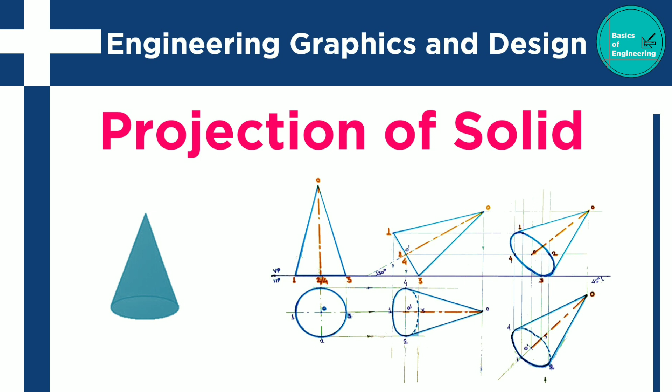Hello everyone, and today we are going to solve a problem related to a projection of solid. For that we'll solve one example.

This is the example: a cone with the 40 mm base circle diameter and height 70 mm resting on HP such that its axis makes an angle 30 degree to HP and a top view of axis is inclined at 45 degree to VP. Complete the projection. So this is the question related to the cone. Let's start to solve the problem.

This is the cone. All of you know that this is the base of cone, this is the apex point, and this is the surface of a cone, where the axis is from the center of the base and the apex point. There is the one axis. So in the problem, the data given is the base diameter of the cone is 40 mm, whereas the height of cone is 70 mm.

Now you can see here the top view of cone is simple circle. So when we observe the cone from the top side, it is visible as simple circle, whereas the front view of the cone, when we are observing from our front side, you can see here it looks like one triangle. So when you observe a cone from the front side, it looks like a triangle. When we observe the cone from the top side, it looks like a circle. So let's start how to solve the problem.

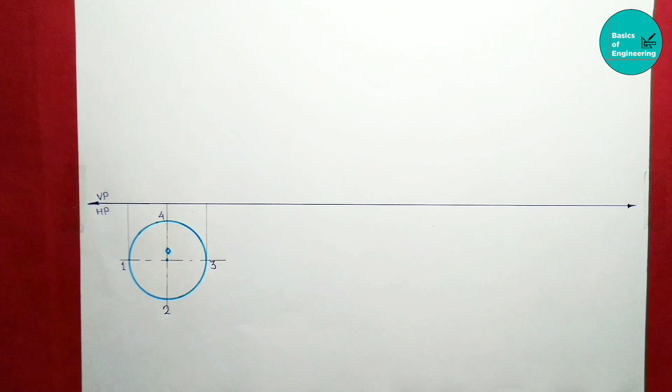Now take the projection of all points. This projection should be vertical. Projection of 1, projection of 2, projection of 3 and projection of 4. So projection of 2 and 4 is at same line. Now the height of cone is 70 mm. From O point, draw an axis with the height 70 mm.

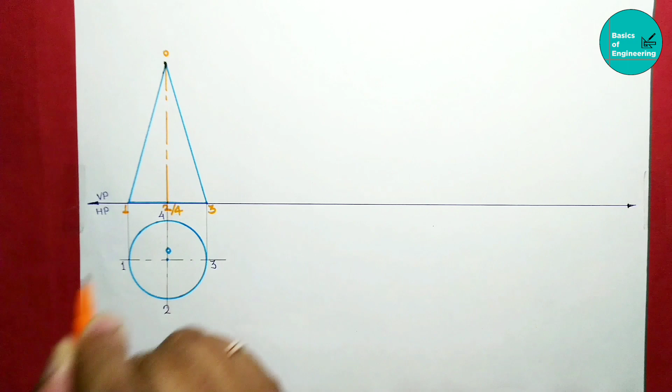So this is the height of cone, which is 70 mm. And now join all these points and complete the triangle. The name for each point: point number 1, point number 2, point number 3 and again point number 4. So this is simple front view of cone and top view of cone. So this is called first position of solid.

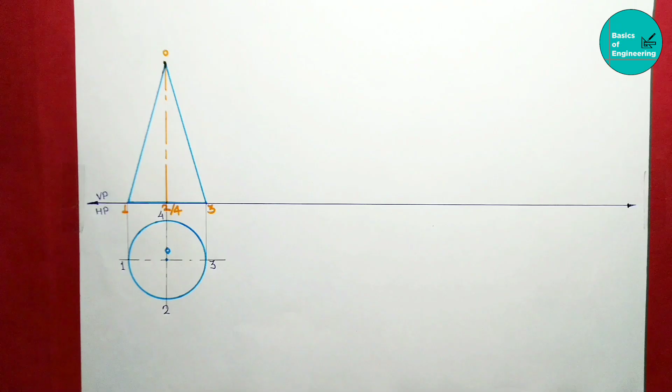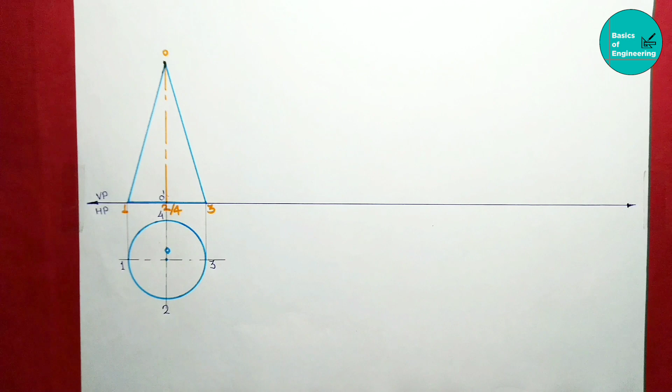Now we are going to draw a second position of solid. Here they mention that in second statement it is resting on HP such that its axis makes 30 degree to HP. So for the second position we are going to consider the inclination with the HP. Now you can see here the axis of the cone is here O to O dash, which is now vertical. As per the problem, this axis is inclined at 30 degree. So simply, we are going to draw this axis at 30 degree.

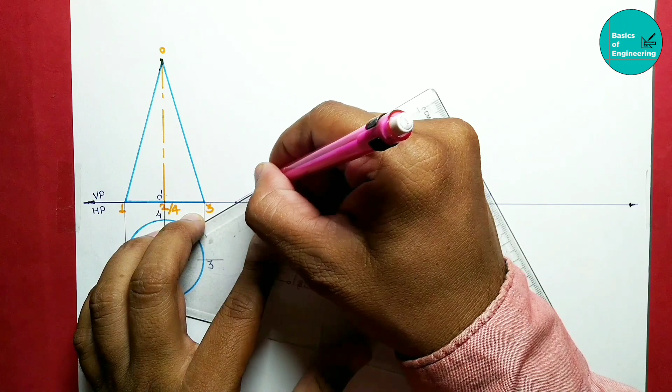So take one point here and from that point mark the angle at 30 degree and draw one faint line which is nothing but axis of the cone. If this cone is inclined in this direction with 30 degree, the total triangle is inclined and it is visible like this. So the base is here in this position. The base is 40 mm.

So perpendicular to axis, you can see here the base is perpendicular to axis, and we require this 3 number point on HP, so we have to draw one line which is perpendicular to this axis as well as it is perfectly 40 mm, and where the last point should be on the XY line.

So simply, take this 20 mm line on center. This should be perpendicular to axis. Drag the roller or adjust the distance such that this should be 20 mm and this should be 20 mm, and draw the base.

This point is point number 3. This point is 2 and 4. This point is point number 1. Now we require the apex point. So take the compass, take the distance 1 to O, which is the same as 3 to O. So mark the arc from 1 to O or 3 to O on the axis, so that you will get on the axis this point O, or you can say this is your apex.

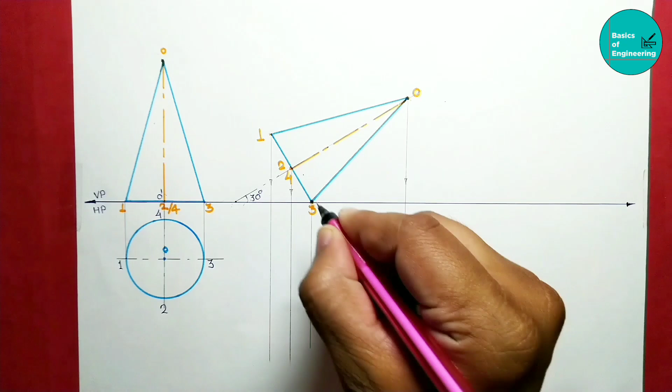So for that, take the projection from the front view. So take the projection which is properly vertical. So projection of 1, projection of 2, projection of 3 and projection of O. So projection of O, projection of 2, projection of 1 and projection of 3. Also take the projection from the top view.

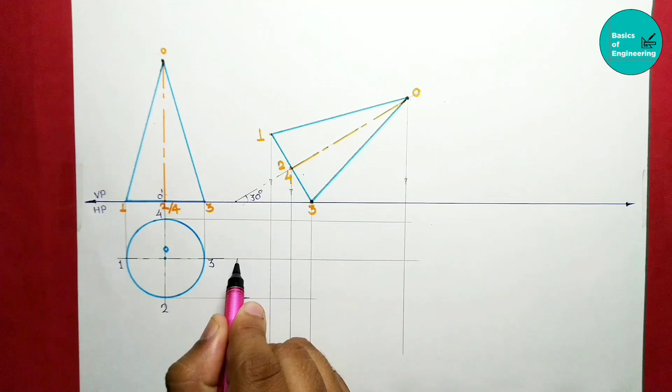So projection of 4, it should be properly horizontal. Projection of 4, projection of 1, projection of O and projection of 3. So all projections on the same line. And the last one is projection of 2. This projection is from this direction. So take the projection from the front view, take the projection from the top view and mark the point.

Projection of 2, projection of 2. So this is your point number 2. Projection of 1, projection of 1. This is your point 1. Projection of 3, projection of 3. This is your point 3. Projection of 4, projection of 4. This is your point number 4. So these are the base points.

Also here the O dash point is here. So projection of O, projection of O dash. So this is point O dash. Projection of O, projection of O. When you observe it from the top direction, the cone is in this situation. Here the half part of the curve is visible, whereas this triangle is visible. So half curve is visible, whereas the half base is not visible.

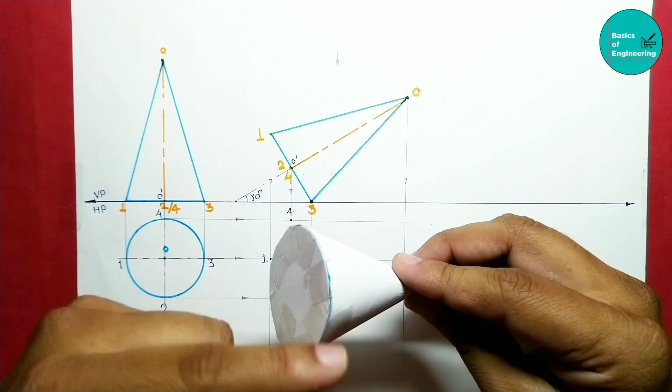Clear? So this is the base of the cone; when it is inclined in this position, half the base is visible, whereas half the base is not visible. When you observe from this direction, point 1 is directly visible, whereas point 3 is not directly visible, because between the observer and 3 this line is in between. So when you observe from the top direction, it stops at this position, so it means point 3 is not visible. So point 1 is visible whereas point 3 is not visible.

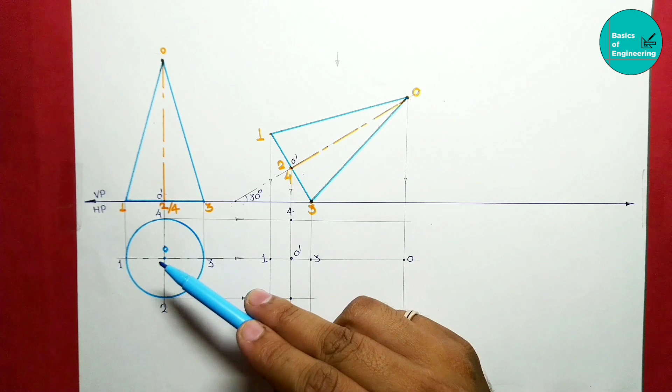So which point is visible? From that point, the left side point and right side point are visible. Whereas for the point which is not visible, from that point to the left and right points is not visible. So simple, 1 to 4 is visible, 1 to 2 is visible, 3 is not visible, so 3 to 2 is not visible, 3 to 4 is not visible. So join these points in the sequence 1, 2, 3, 4, but it is a cone, so it's visible as an ellipse. You can see here, when you observe this, it's visible like an ellipse.

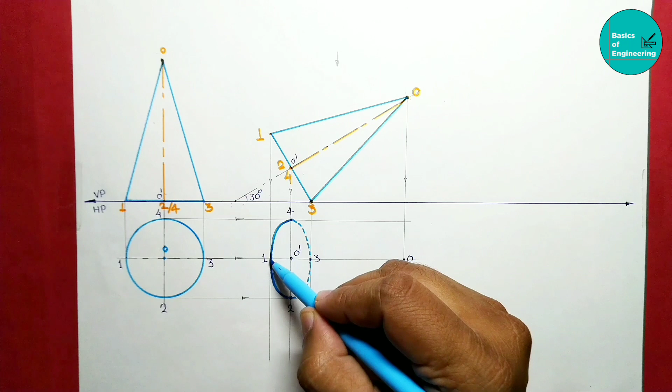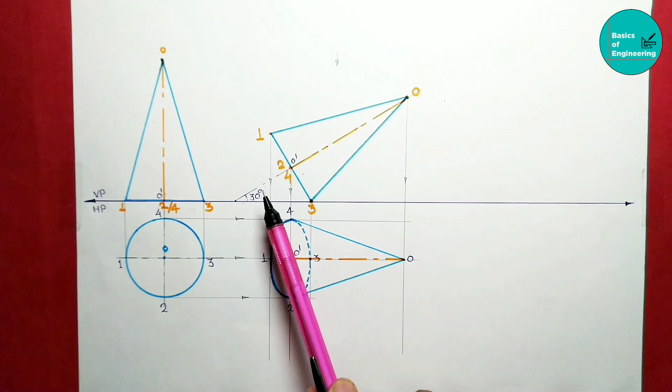So 1 to 4 visible, 1 to 2 visible, whereas 3 to 2 invisible, 3 to 4 invisible, and then join O to 2 and O to 4. Also draw the axis O, O dash. The first position is a normal position, the second position is inclination with HP. Now we are going to consider inclination with VP. So the top view of the cone is inclined at 45 degrees with the vertical plane.

Now you can see here the top view of the axis, which is O, O dash. Now it is horizontal, but the condition requires a 45 degree inclination. So simple, we are going to copy this object here with the axis inclined at 45 degrees. So first of all, draw the axis at 45 degrees. First take a point somewhere here, draw one line at an angle of 45 degrees. Mark the angle at 45 degrees.

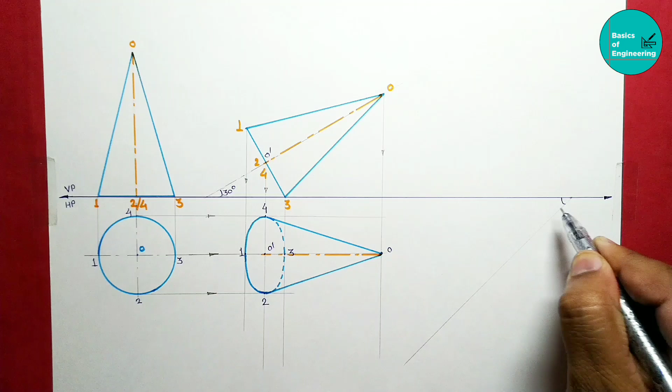So this angle should be 45 degrees as per the example. This axis, which is now horizontal, we are going to incline at 45 degrees. So this is the position, and we are going to incline it at 45 degrees on another side. So first mark the point O. So this is apex point O. Now with respect to O, mark the other points.

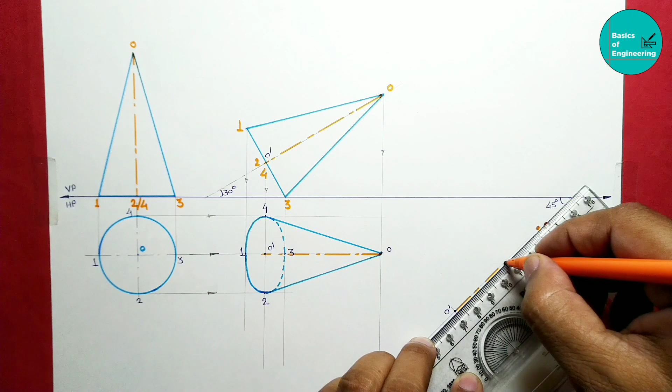So for that, take the compass. First take the distance O to O dash and mark the point here, which is your O dash. So this is the axis of the cone, which is inclined at 45 degrees. And on the same line, point number 1 and point number 3 are also there. So simply take the distance O dash to 3, which is the same as O dash to 1. Both distances are the same. So mark O dash to 3 and O dash to 1.

So this is point number 1 and this is point number 3. Then two points are remaining, point number 2 and point number 4. So simply take the distance 1 to 2, mark one arc, and take the distance 3 to 2, which is the same. So mark the arc. So this is point number 2.

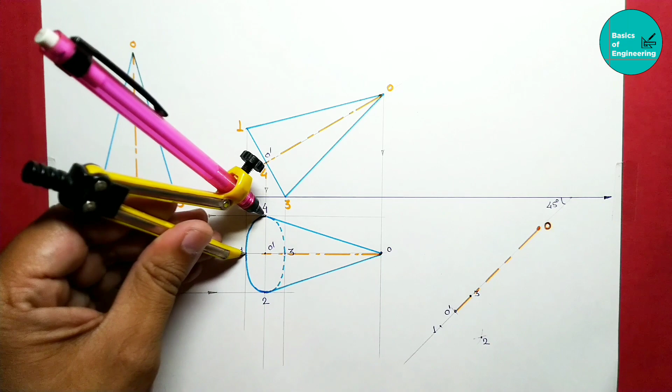Then take the distance 1 to 4. It means from two respective points, find out the other point. So from 1 mark the arc, from 3 to 4 mark the arc. So this is your point number 4. Similar to this, join all the points.

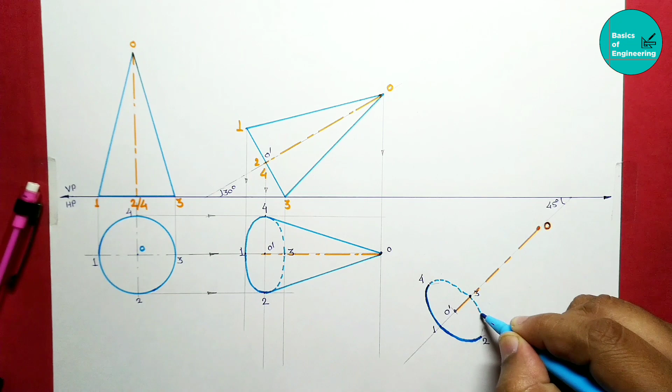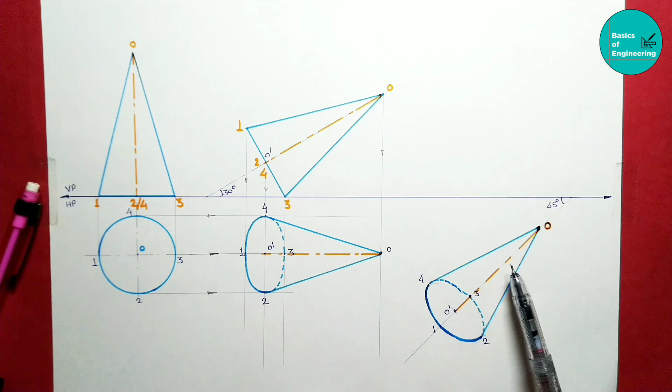So this is the first position, this is the second position where the axis is inclined 30 degrees with HP, and now the third condition where the axis is inclined 45 degrees to VP. Now in this position we copy the same object with the axis inclined at 45 degrees. Now the last position is remaining.

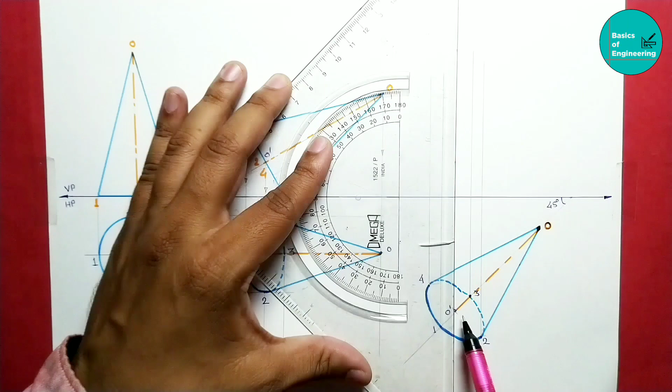So to form the last position, take the projection from the top view: projection of 1, projection of 2, projection of 3 and projection of 4. Also take the projection of O dash. Always take care that the projection should be properly vertical and horizontal.

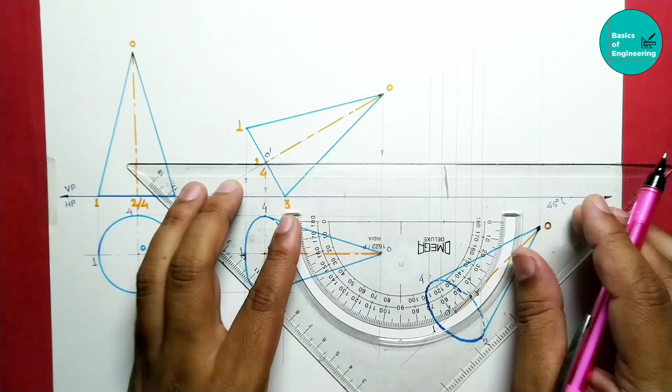Projection of O dash. Now take the projection from the side view: 2 and 4, projection of 1, projection of 3 is here on the XY line, and projection of O. So mark the intersecting points.

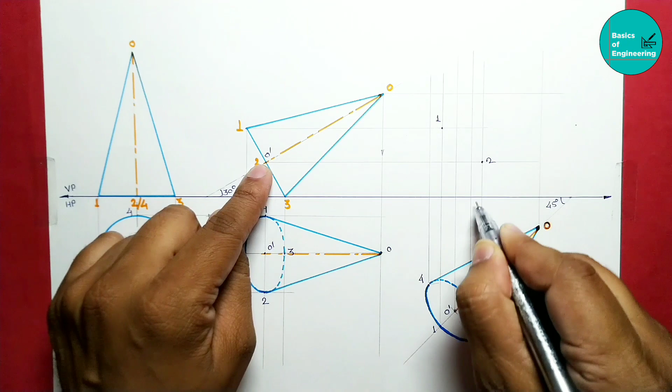Projection of 1, projection of 1 here, projection of 2, projection of 2, projection of 3, projection of 3, projection of 4, projection of 4, projection of O dash, projection of O dash, and projection of O, projection of O. These are the points for the last position.

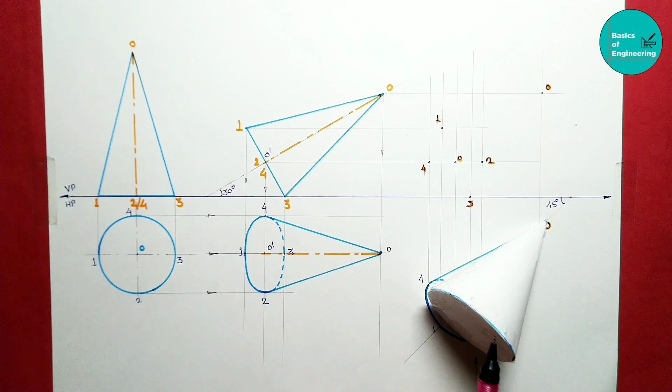Now when you are observing from the front direction, the base is nearer to the observer. So the base is visible. So 1 to 2, 2 to 3, 3 to 4 and 4 to 1, all points are visible, and we are going to join all these points with a continuous line. Now you can see here, when you observe from this direction, this base is visible. So we are going to join all these points as visible points, meaning with a continuous line.

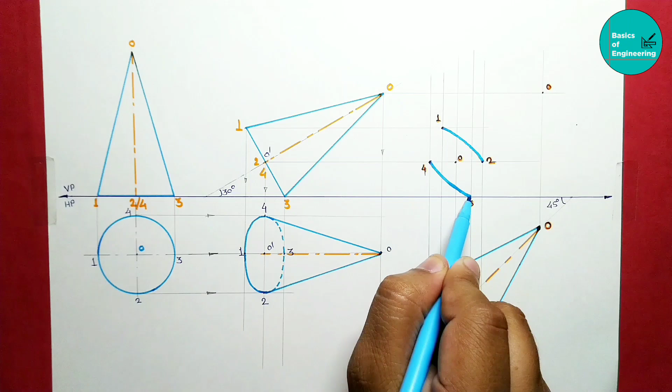So how to draw these points? How to join? From 1 to 2, draw one arc, join 1 to 2 like this, 4 to 3 like this. Join the remaining part such that it is visible as an ellipse. So join 1 to 4 and 2 to 3.

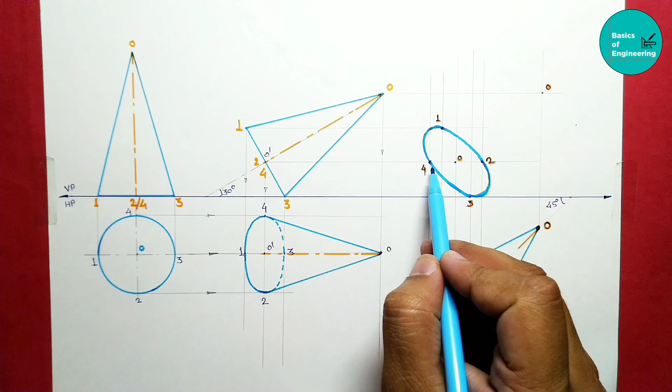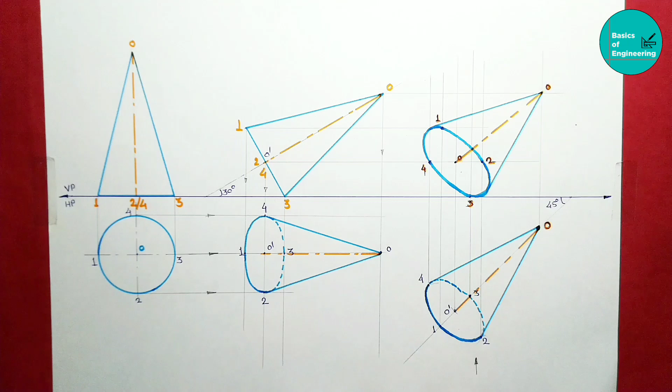Now join O to the outer point of the base, and then O to the other outer part of the base, and last O to O dash, the axis point. So this is the solution for the problem where the cone is resting on HP, the axis is inclined 30 degrees with HP and the top view of the axis is inclined 45 degrees with VP.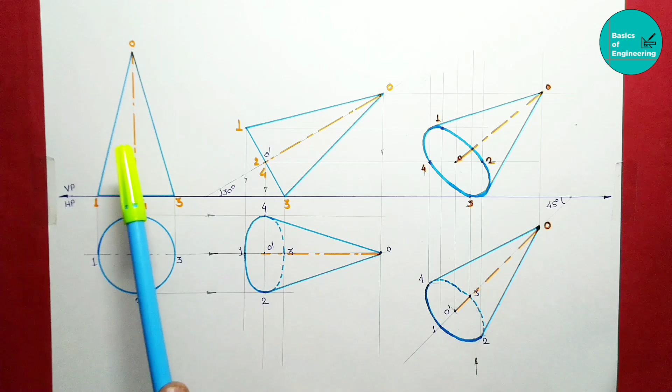This is how we solve the problem of projection of solids: first position, second position and third position. The sequence is: first we draw the top view of the solid, then the front view of the solid, then copy the same front view with the condition given, then take the projection from the front view, take the projection from the top view and form

this top view. Then as per the third condition, copy the same object and incline it as per the given angle, and then take the projection from the top view, take the projection from the front view and form the last view. This is called the projection of solids.